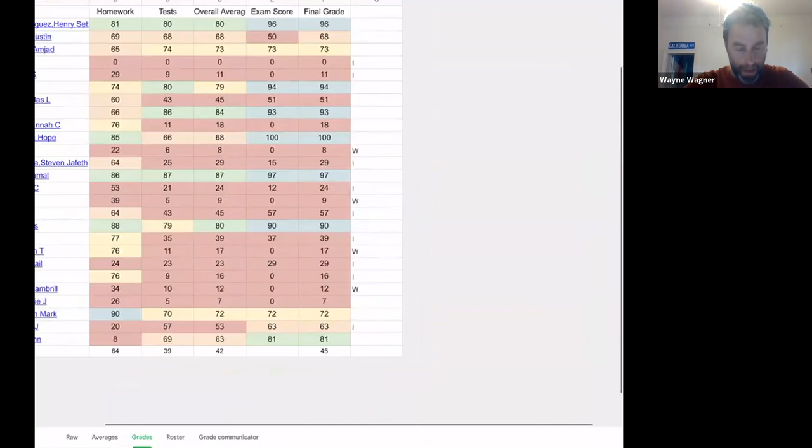Okay, so let me give you an example here. Where did it go? Oh, here we go. All right, this is from a random semester. This semester is actually fairly recent, but I won't tell you what class it is, whether it's statics or fluid mechanics. In fact, I don't even know because I've forgotten. This is how I calculate your final grade. You see there's a homework column. I'm scrolling over so that you can't see the names. But you see there's a homework column, there's a test column, and then there's an overall average.

Okay, look at the overall average and compare it to the test average. Now you'll notice this semester about half or 2/3 of the class disappeared. So that's why everything is highlighted in red. So that's how I determine your grade, is by what color the computer highlights you. So like that person at the top, their overall average was an 80. So they're highlighted in green. I didn't make any decisions. I just enter the grades in the computer, and then it will highlight you based on what your grade is.

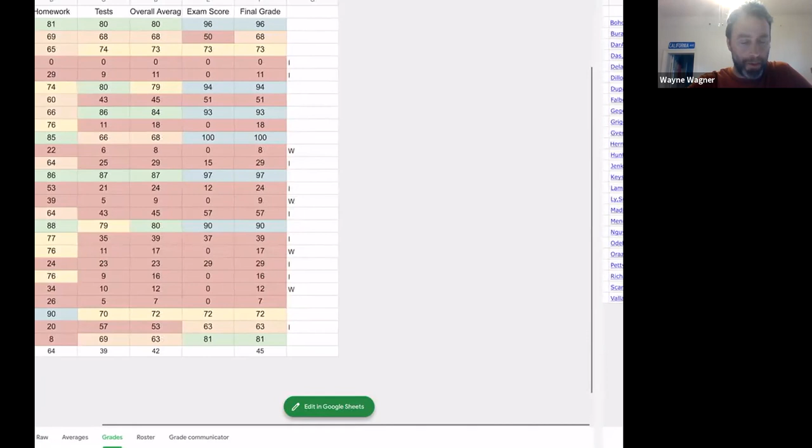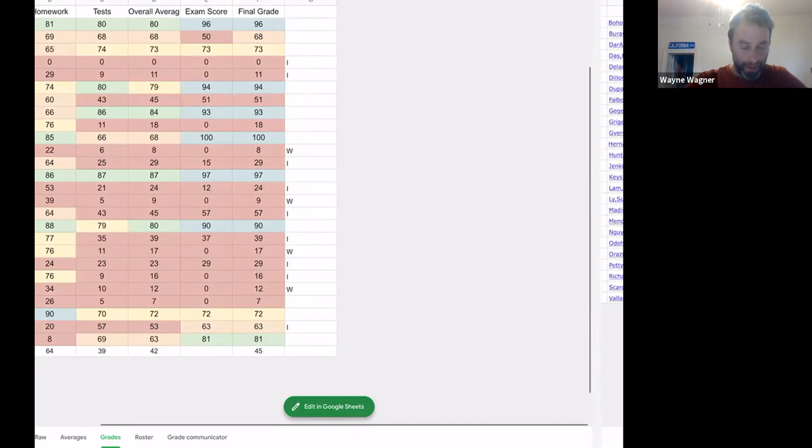So the middle column is the overall average, the left column is homework, and the next column is tests. And if you look down that, look at how the test grade and the overall average are basically the same. And look for people whose homework average actually bumped them up or down a grade. Extremely rare. It's extremely rare for your homework grade to really matter. All the way down at the bottom, there was somebody who had a 90 homework average, had a 70 test average, and they got a C. And that bumped them up 2 points. It's not important really. And I'm not saying homework is not important, but your homework grade is not important. Okay.

Now, since we're here and we're staring at this, you'll notice the exam score goes into that test average, but also if your exam score is higher than your overall average, your exam score counts for your final grade. So you'll notice that first person at the top of this particular class who had a B average all semester, they got a 96 on the final. And so they got a 96 in the class, even though their overall average was an 80. Okay, and so that's on offer to you guys too. I do that in all of my classes.

That's just something that, or like, about halfway down, there was somebody who had an 87 overall average. They got a 97 on the exam, and so got a 97 in the class. And the other thing you'll notice is that the people who get those really high grades, most of them have really high homework averages.

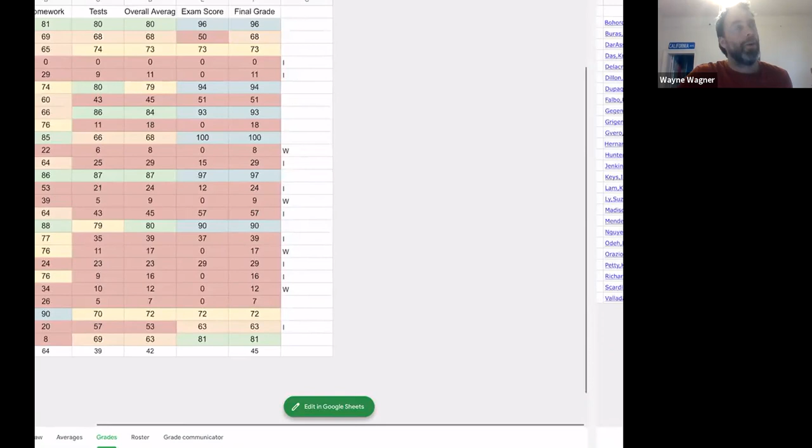And it's not because they begged me for points that they were able to get those really high scores. It was because they worked really hard at the homework. It's about the work that you put in on the homework. It's not about the grade. Okay. And I need that to be clear. I want you all to not stress so much if possible.

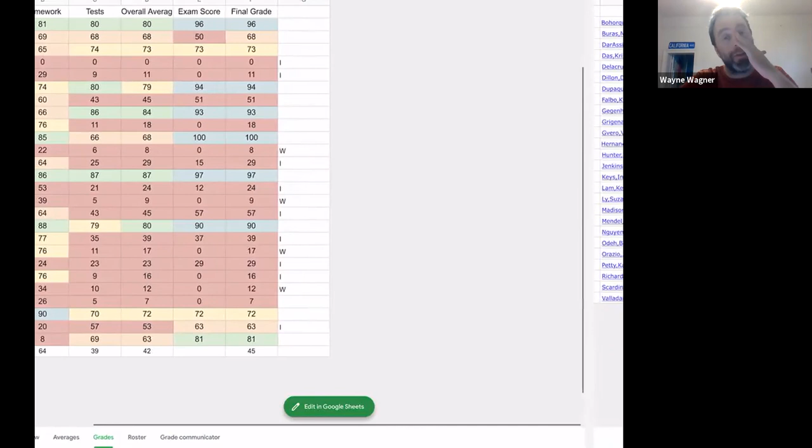Now, obviously, by all means, keep asking me if you think you've been wronged. By all means, let's get it righted. I'm always willing to right the wrongs. But when you forget a homework date or something, don't stress out about it. I still highly recommend you do the homework. And I've structured the late penalties on Connect to be like, hey, look, you're within 10 days. There's still a value to it, point wise. But really, you should do it so that you learn the material.

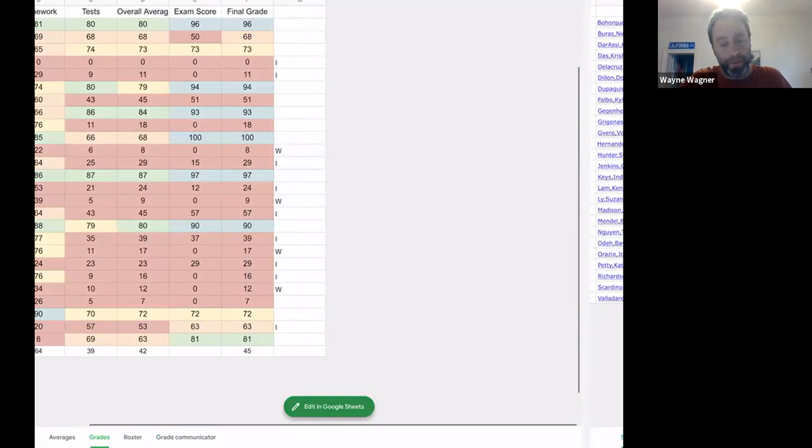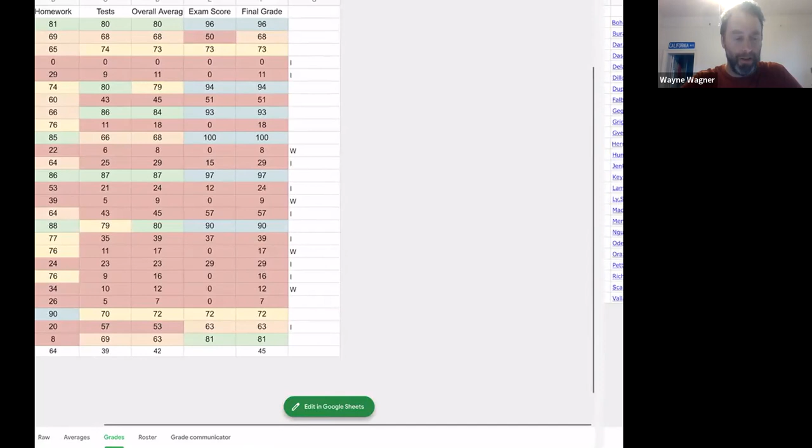Because ideally, you can be one of these people whose exam score is an A, and you get an A in the class, even though maybe your homework average for the semester was in the 60s or the 70s. Totally fine. That's very typical. That's my expectation for most of you, is to have a homework average in the 60s, 70s, maybe at best in the 80s. It's very rare for me to have somebody have a homework average in the 90s. And it looks like somebody in this class down there at the bottom had a homework average in the 90s.

So what I'm saying is, let's take care of business, but in the sense of, let's learn what you need to learn from each assignment, right? I'm picking problems that I think will teach you something. I'm not just giving you busy work so that you can get some points. I've considered just making homework worth nothing, essentially just giving you all the points, but then no one would do the homework, right? So it's impossible for me to figure out how to do this correctly.

But I think we're losing focus on what the point of the homework is. So again, if I've somehow messed up and I owe you points, by all means, let me know. But please don't stress out about it. It's not worth that much. So even if you were to look at these, about 2/3 of the way down, there's someone who had an 88 homework average and a 79 test average. And that 88 pulled them up to an 80, and they should have had a B

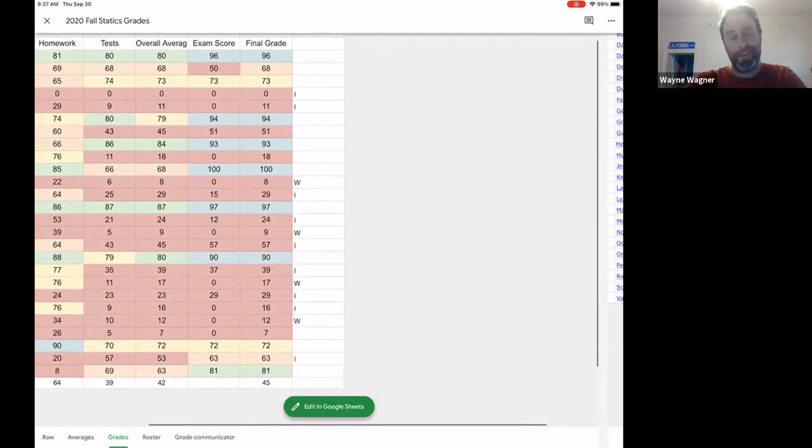for the class, except they aced the final. So if you see that column, it's 88, 79, 80, 90, 90. Well, they aced the final because with that 88 homework average, they were clearly working really hard on the material. But let's suppose they didn't do all that well in the final. And you're like, well, look, it bumped them. Yes, it did. But a couple of homework points here or there wouldn't have made the difference. It was really that they were on the bubble, and that 88 was high enough relative to that 79 to bump them.

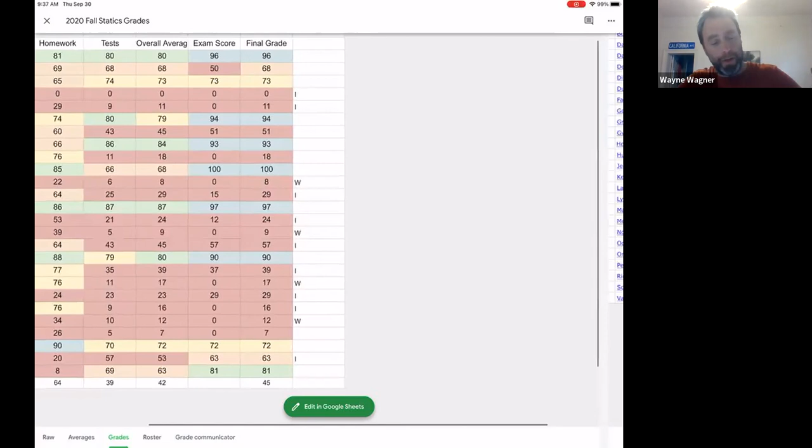So anyway, play with the numbers if you want, your own numbers. Obviously you can't play with mine. So anyway, just something that is kind of affecting my... where are we? Where's my Zoom? Here we go. Okay, so I'm going to stop share and I'm going to actually teach and not talk about that anymore. Any questions about that?

Okay, I mean, I know that I'm probably not going to convince some of you. It's been so hardwired into us that people always say, well, homework is the most important thing. And really what they should say is it's what you learn from homework that's the most important thing. And of course in high school, and I won't say that there aren't college professors this way, there are college professors this way who basically say, look, if somebody does the homework, I'll bump them.

I'm not going to bump you because you did the homework. I want you to learn the material. I only care about the material.

Okay. All right, reactions. All right, so what we're going to do here, hold on, I want to be able to see you guys if I can.

Okay. So what we're going to do here is we're talking about reactions. So basically, what a reaction is, it's like how does something, usually just a frame of some sort. It could be a truss, it could be just a frame, it could be anything. And so the reaction is basically, what does the rest of the world have to do to support our frame? Okay, so what kind of moments, what kind of forces does it need to keep something going?

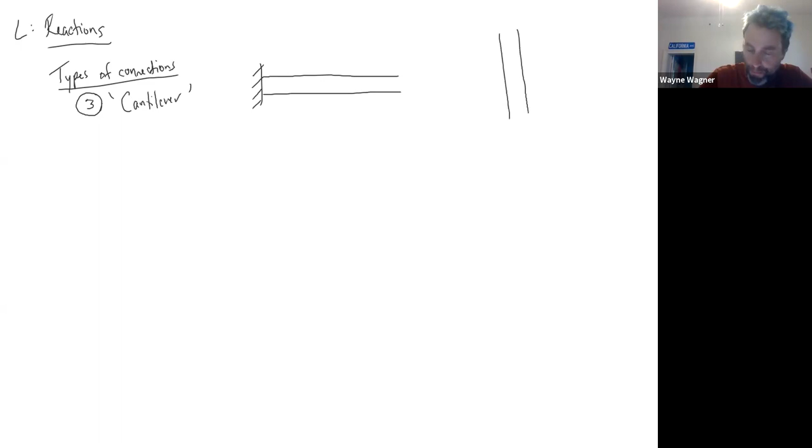And so what it boils down to is, it's usually horizontal or vertical. It doesn't have to be. But what it looks like is this. This is how it's always drawn. The right-hand side goes off and does whatever it does, but I'm concerned with this left-hand side. And it's drawn like that, or it's drawn like this. Again, there could be stuff up there on the top. I'm not really worried about the top in this case. I'm worried about the bottom.

And so when you draw a free body diagram of that thing, what you have to think about, and this is really the easiest way to think about it, is you say to yourself, okay, what kind of forces can the environment put on that cantilever? So if I were to draw the free body diagram of this thing, I'm going to cut off the world, and I want to think about what forces. Let's say this is point H, we'll just give it a letter. We'll call this point I.

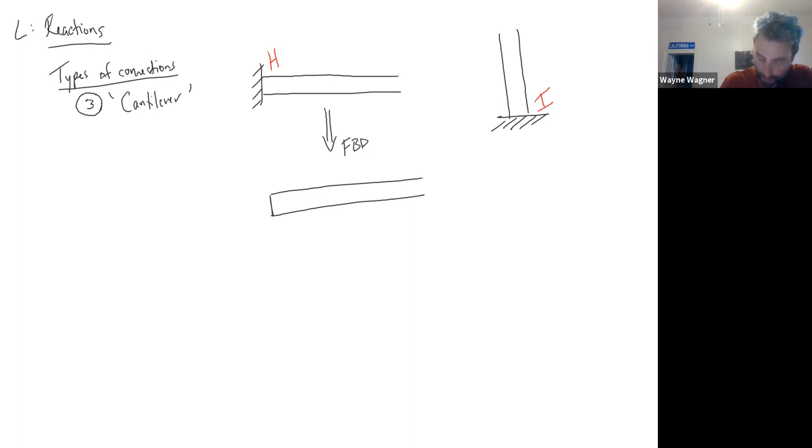Anyway, it doesn't matter. So when I've got this point H, I want to think about, well, what happens if I were to try to move this particular beam up or down, could this environment push back? And the answer in this case is yes. Let's think about the one on the right first, actually. I'm going to cut away the rest of the world. I'm going to do my free body diagram.

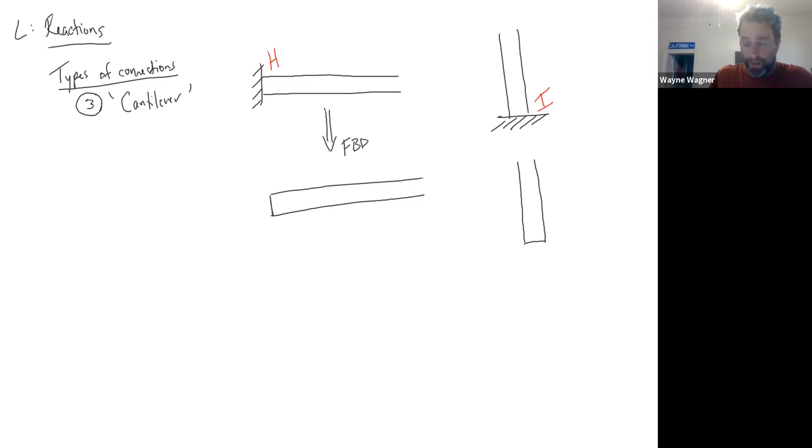So let's suppose you're walking down the street, you see this pole sticking out of the ground, and it's buried in there or whatever. And so it's kind of cantilevered like this. And so you say, well, okay, if I push against the bottom of that pole, will it push back? And the answer is yes. So I know that there potentially is a force right here. And we'll call that force I in the X direction.

Okay, and then I'll ask a second question. What if I walked up to that thing and I tried to pull it up, like I tried to pull it out of the ground? Will it resist that? Or tried to push it down into the ground? Will it resist that? And the answer is yes, it can have a force in that direction.

Oh, I should note that these are all 2D. Okay, we'll talk about 3D drawings of these in a bit. Okay, so then the last question I want to know is, will this thing resist a moment? So what happens if I twist it?

So if I went down to point I and I put a screwdriver in at point I, in the Z direction, so in or out of the board, and I tried to twist it somehow, would it resist that? And the answer is yes, it would. Okay, so that means we've got a moment. So I'll call that moment at I, a moment at I.

Now, what I'm going to recommend in general in a problem is, if you don't know the directions of the forces that you're assuming, you just assume them to be positive. That's generally a preferred way to do it. I'm going to recommend you do that again and again and again. Okay. So that would be the cantilever on the right.

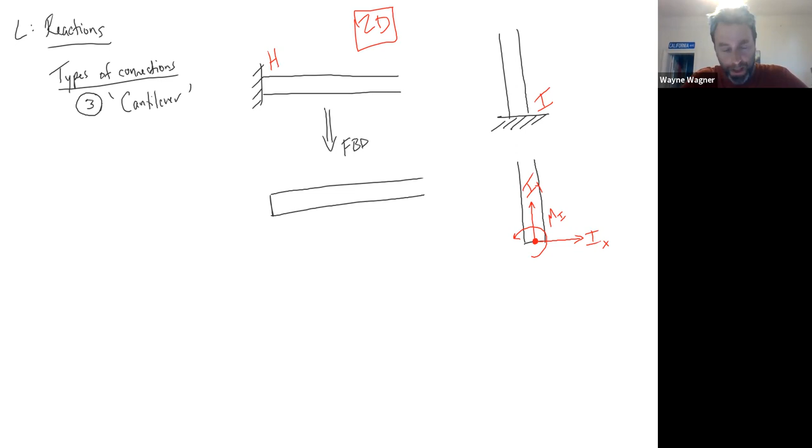The one on the left, it's the same sort of thing. So if you imagine I went up to point H and I just started pushing at the bottom of that thing and I started pushing up, or I'm pushing down, whatever. Could it resist? And the answer is yes. It's not going to easily move from that position. I'm trying to think of a case where you've got like a,

something that looks like this, a cantilever like this. And so what you can do here is once you notice you've got a cantilever, you know that this thing is solidly in that wall, right? So you can go, oh, okay, well, it's gonna look like this. If I push on this particular thing and I push this way, or if I push this way, that wall can push back. Okay, so that's gonna be HX.

And again, if I walk up to that thing and I just start twisting it either this way or this way, it can resist. It's not just going to start twisting freely. So what I'm going to do is I'm going to create a moment in H. And that moment is being caused by the wall. Right, the wall is resisting my motion.

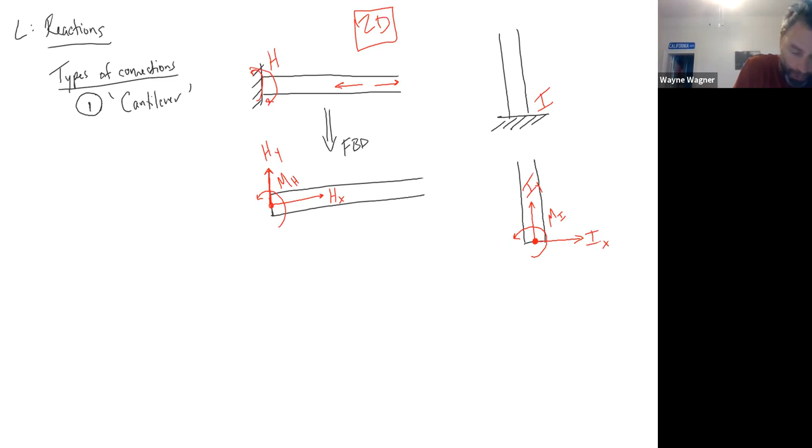Okay, and now I'm seeing why I should have done this in the opposite order. I should have gone from least restrictive to most. Okay, so that's the cantilever. Any questions on that?

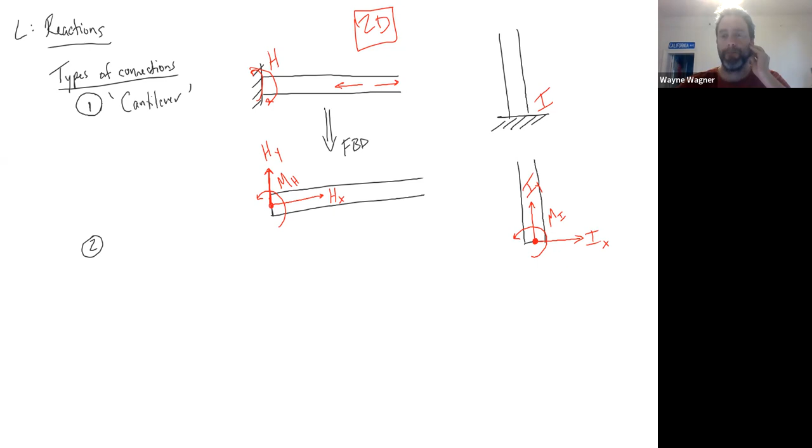Okay, so you're saying like, can you hear me? Yep. Okay, so the moments, is that like twisting it? That's not like rotating it around the axis, it's actually trying to twist the pole. So the moment, the MH or the MI, is actually the ground preventing it from twisting. So if you twisted the one on the right to the right, it would look like the one on the left. No, these are unrelated.

Oh, okay, so if I were to go up to this thing and I were to twist it this way, right? I were to apply a moment to try, oh, sorry. Come on, you can erase, you can do it. Why won't, okay, there you go.

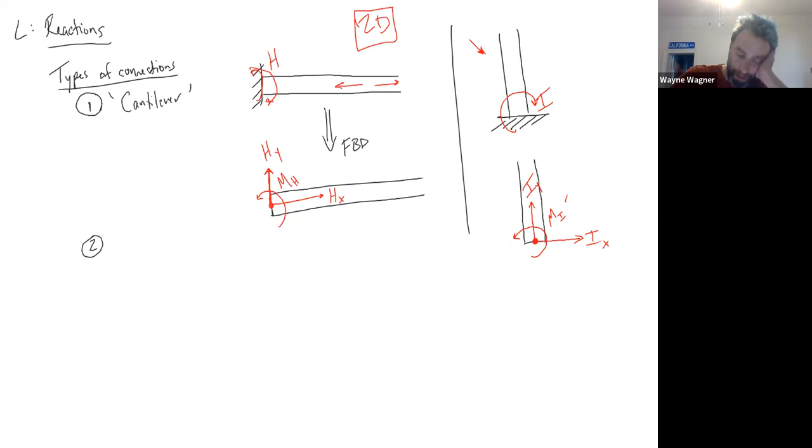So if I went up to the one on the right and I said, okay, I'm gonna start twisting on it like this, the ground essentially is gonna resist that by doing an equal and opposite moment. If it can't resist it, then the pole is just going to twist over. We'll have a failure. So maybe it's raining or something, and it just can't support that kind of moment. I see what's going on. Okay. So any other questions?

Okay. The next one is usually called a pin connection, and a pin looks like this. Let's see. There's a few different ways that you can draw it. The most common looks something like this. Well, let me draw one relative to the environment and not an interior one. Usually you draw it like this.

And then you've got a frame piece going this way. Again, I'm not worried about the rest of the frame. I'm just worried about this. And what you do is you draw the pin like this.

Okay, now again, this could be horizontal, vertical, whatever. It could be over here, with the frame going this way, whatever the case may be. What we're showing here is that that particular member of the frame is connected through this pin. So you just kind of nail something through the middle. And again, what we want to think about is, let's do the free body diagram.

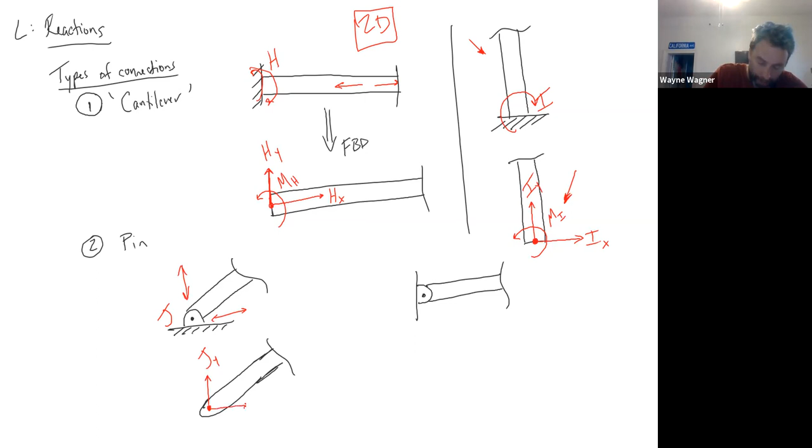We'll call this point J. So I've got a JY. If I decided to go over there and push it left or right, will that pin resist that? Will it try to keep it in the same X position? The answer is yes, so this is going to be JX. Now, if you can't figure out the sign, I always just assume positive.

And the last thing you'll want to do is say, well, what happens if I go up here and start twisting it? Will that pin resist that? The answer is no, it will not. Obviously, we're assuming a frictionless pin. If the pin is frictionless, it will not resist that. So the pin itself does not apply a moment to that frame, no matter what. And that's the same thing over here.

So every time you see a pin connection, the free body diagram looks like this. Right off the bat you can say, well, this will be KY and KX. So KY and KX. And in no way, shape, or form will you ever find a case where this thing can suddenly...

Hey, Wayne, for purposes of this example, do we worry about the bracket attached to the wall, like forces being transferred through the bolt or pin to the wall? Or are you just focusing on the hinge? We're just focusing on how the hinge is supporting the rest of the frame. If you were asking about the bracket, then the wall can support a moment on the bracket, but that moment cannot be transferred to the frame because it's going through a pin. Makes sense.

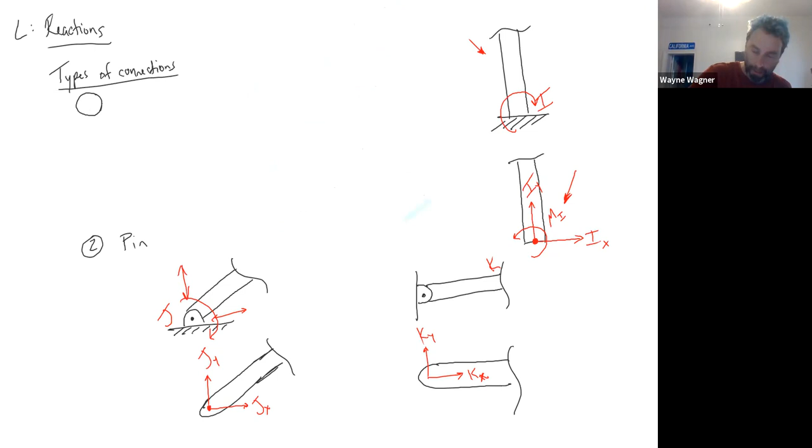So this is pretty straightforward. The pins are pretty straightforward. It's the last one that we're going to do that can be kind of strange, and the last one is the roller. Rollers can be written a lot of different ways, and hopefully I can remember them all. Let's see if we can do the roller. It looks like a wheel. Usually you'll write it like this; this is the most common.

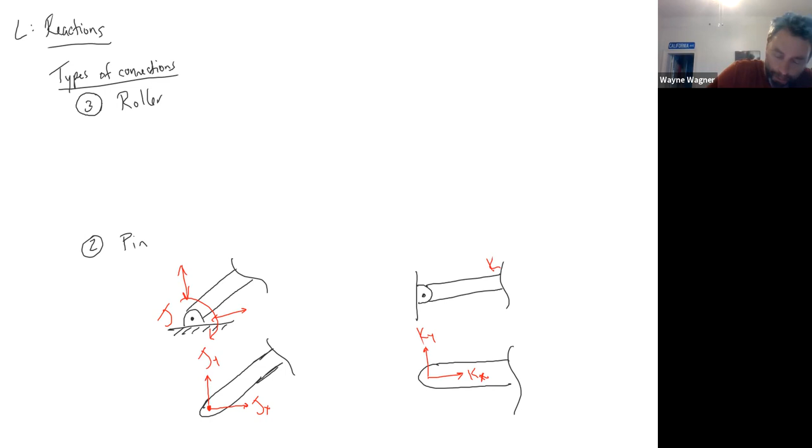This is a very common way. You've got some sort of frame, and it looks like it's sitting on a wheel. You will also see it drawn like this. I'm going to draw a few of these. Sometimes you'll see it like this. Sometimes it'll look like a little rocker. I really hate when they do the rocker. It doesn't really matter. The key is that when you see it, you go, oh, I see what's going on here.

And usually, the bottom is almost always drawn with these diagonal lines to let you know that that's what's going on. Okay. And again, in this case, what you have to think about is, okay, if I walk up to that thing and I want to draw a free body diagram, then what I'm going to do... I mean, all of these are the same drawing. They're different looks of the same drawing. So here's my free body diagram.

Okay, and I want to look at it, and hopefully you're already understanding what I'm saying here, that if you push on this thing up or down, well, it's going to resist. Okay, now rollers as drawn really only push up. But a lot of times there are problems where they'll say something like, this roller is on a track and the track is keeping it from moving.

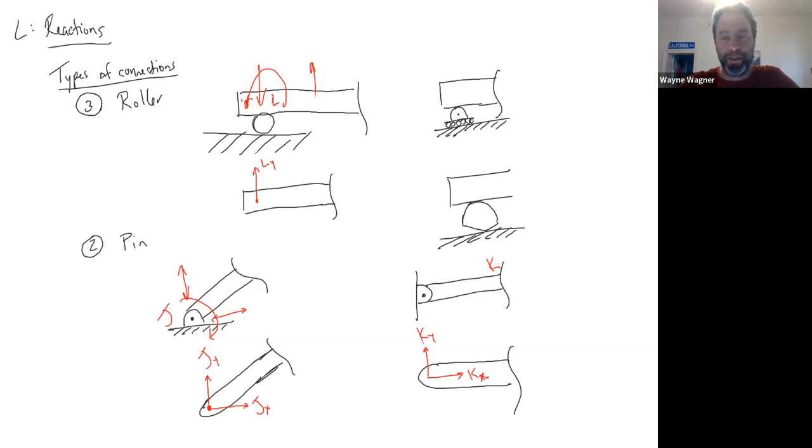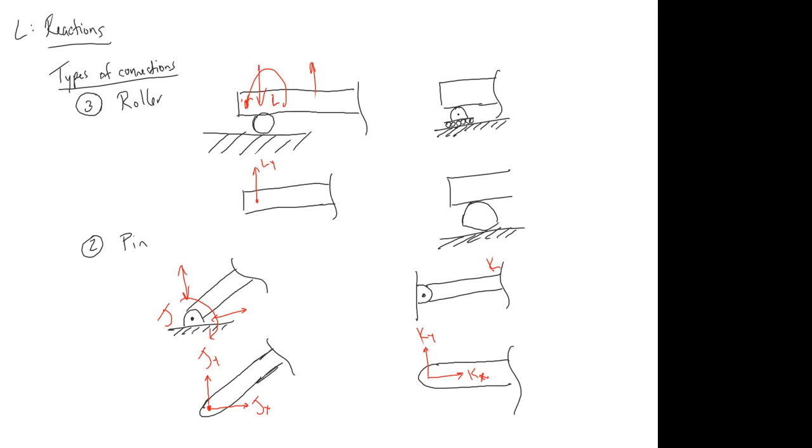Okay, yeah, go ahead. So the roller, no force in the X direction? No force in the X direction, unless the roller is oriented vertically. And then the pin also has no moment because it's freely swinging about that pin? Yeah, that's actually the correct term for it, freely. I don't know about freely swinging, but freely moving or freely rotating would probably be the best term for it. Okay, cool.

Okay, yeah. And that's really what you always want to think about. Obviously, in the real world, there's friction and things like that, so there's nothing perfect like this. I don't know how often we design static things with rollers. I think a lot of times we use rollers in statics class because we haven't learned more structural analysis, and if we don't use a roller, then we can't solve. I'll make that clear as we go.

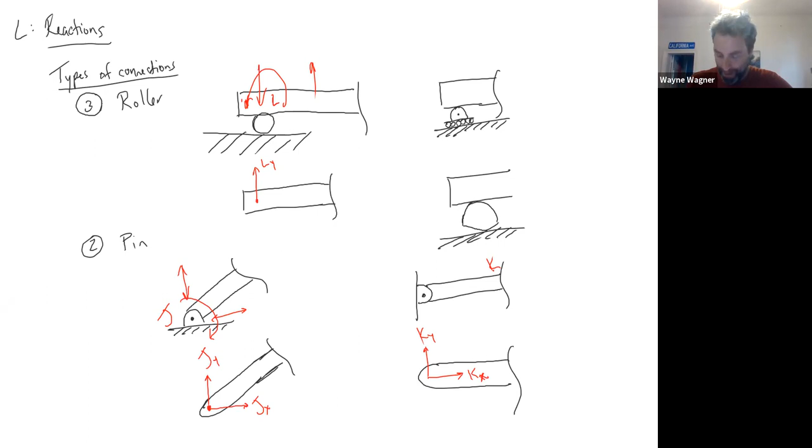So here, I'm going to clear all my drawings, and then I'm going to do an example problem. I did this one on an exam last year. And actually, this one's definitely out of your textbook. I had it open to it. Oh yeah, there it is. Okay, so it's a bit of an annoying problem because it's just got a lot of forces, and it probably wasn't a good one for an exam because it took too long. So there's a frame element here. If you want to look for it in your textbook, it's 4.4.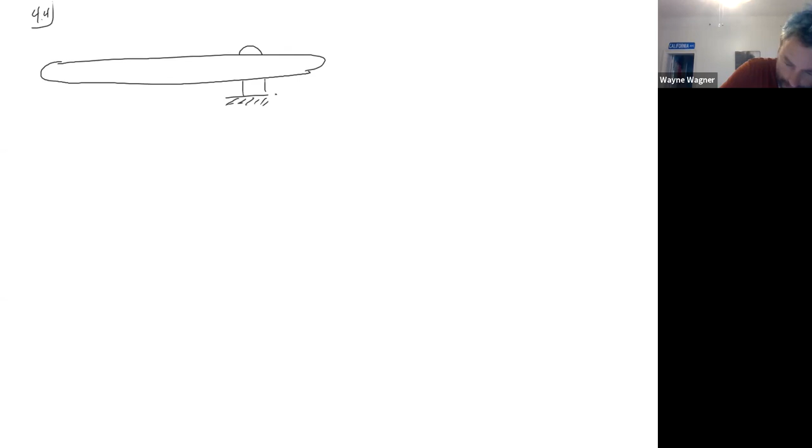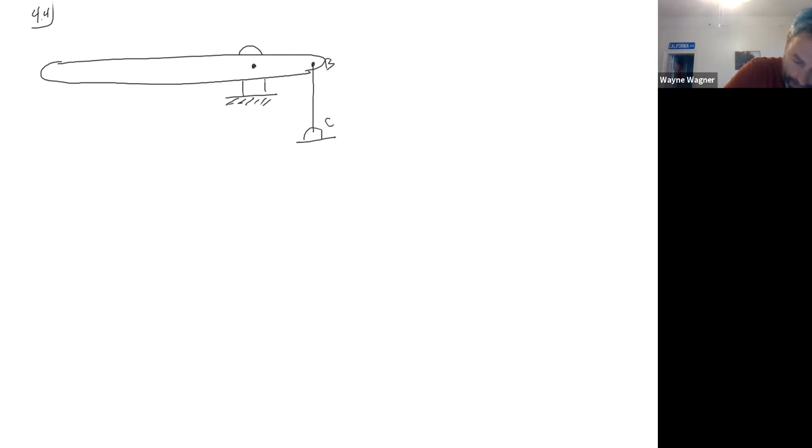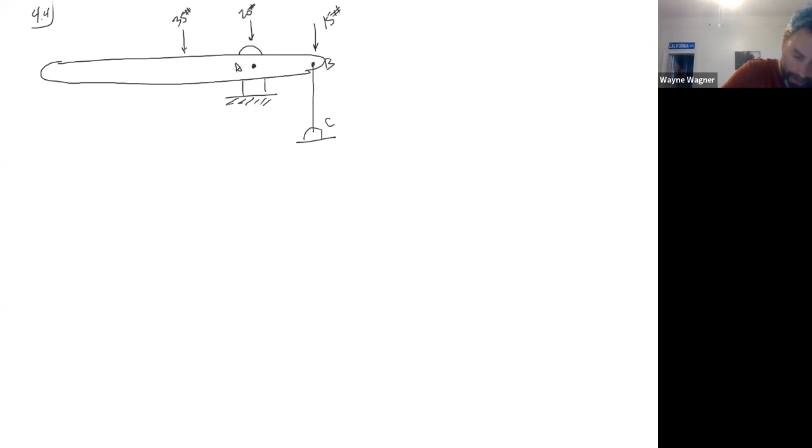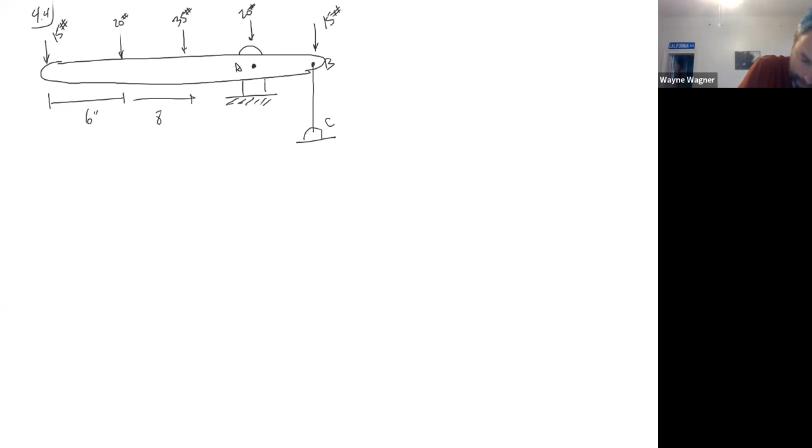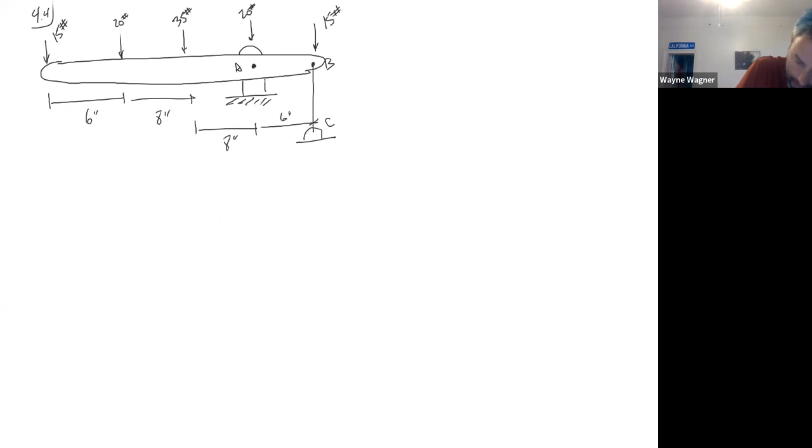Okay, and what is it that we're looking for? Oh, it says solve for the reactions. Okay, determine, so that's given. And the required is we want reaction at A. So I want AX equals what? AY equals what? When they ask for the reactions, usually we say AX, AY. Because this is a pin, I'm not going to solve for the moment at A, we're not worried about that. And then it wants the tension in BC.

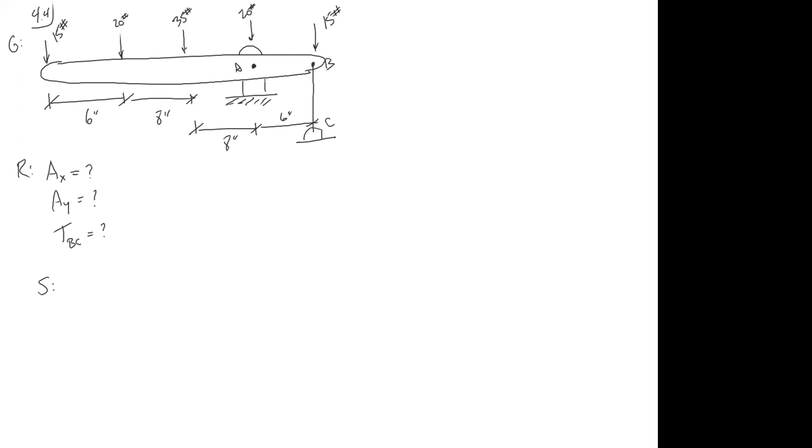Anybody want to tell me how to solve this? What the first step is? Sum of forces. There's something we always do before sum of forces. But that is the correct answer. Okay, so anytime you sum forces in my classes, you have to draw a free body diagram of the thing you're summing forces on. Otherwise, I'm not even 100% sure what that means.

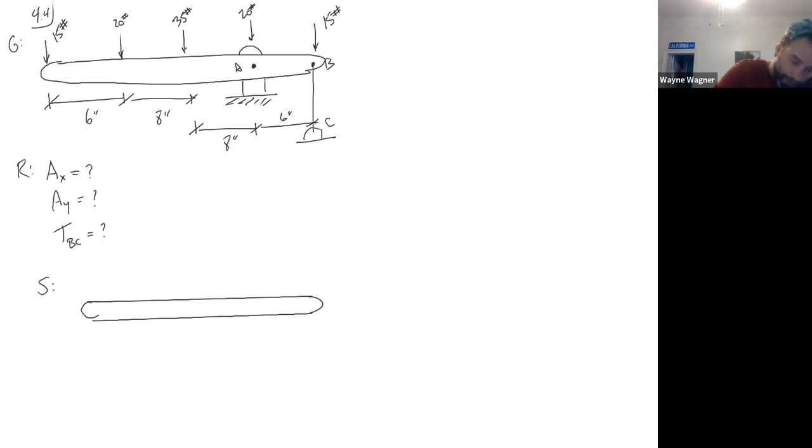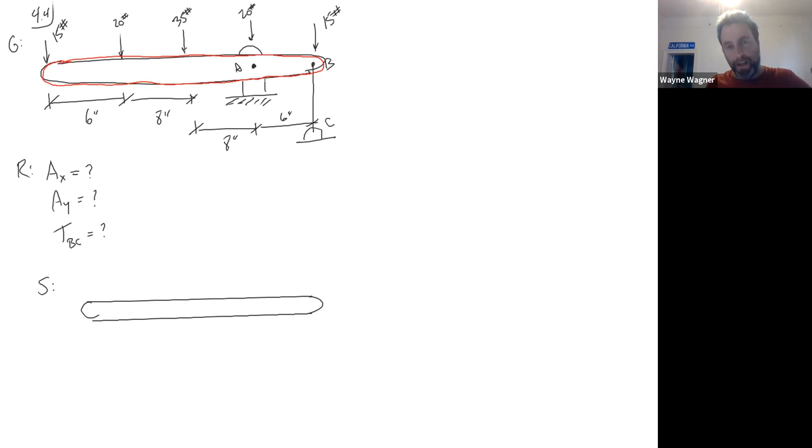So I'm going to go up to this thing and say, okay, this is what I'm drawing the free body diagram of. So I've got this red line. Now I need to think about all the forces. They didn't tell us anything about weight. The only force that doesn't cross that line would be a weight, that's a body force. All the other forces are surface forces, things that I've cut away by deciding that this is my free body diagram.

So I've got 15 pounds here, 20 pounds here, 35 pounds here, 20 pounds here, and 15 pounds here. I also cut away the world at A. So I've got two forces at A because it's a pin connection: AY and AX. And I also cut the rope from B to C, and the nice thing about that is I know that it's going downwards. So TBC.

Note, I don't know which way AX and AY are going. It seems likely that AY is going to be up because we have so many downward forces. In fact, it's really hard to imagine anything else happening. But AX, I don't know. I didn't even think about it, I just automatically make them positive. You will find other people do it differently. But when you solve these, if you get a negative number, that means you drew the arrow in the wrong direction. So you're right, we're going to sum forces.

Basically, this is a two-dimensional statics problem. We know that this thing is not moving, so the sum of the forces in X equals 0, the sum of forces in Y equals 0, and the sum of the moments in the Z direction around a certain point are 0, or really around any point. In the X direction, this is really nice. I'm going to expand this term. I only have one force in the X direction, that's AX. I'll leave the right-hand side alone. So there you go, I've already solved for one answer: AX equals 0.

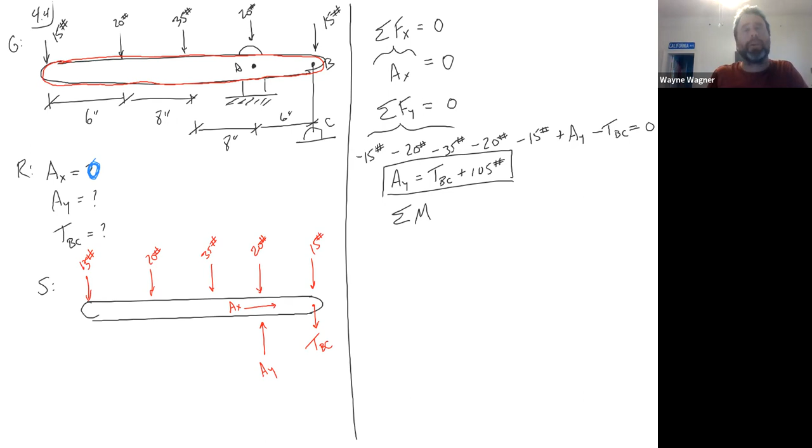Okay. So this is where we're going to start thinking about moments. And there is some magic, maybe not magic, magic is the wrong word, but there is some intelligence that comes with where you pick your moment to be. So we can pick a moment anywhere on this thing. We can even pick it off of this thing if we wanted to. Like I could take a moment around a random point up here if I wanted to.

And what's going to happen is the sum of the moments is still going to be 0. The sum of the moments has to be 0 everywhere on this frame. Obviously doing it up here seems a little bit difficult, a little bit annoying, and not really the way that we want to go. Anybody have an idea what the best point for doing a moment on this problem might be? My first thought is the pin or the rope connection. Okay, so either here at A, where it wants to pivot naturally.

Yes. A lot of times where it pivots naturally is a very good way to do it. I like that location, at A in this case, because it's logical to me. But really A or B is your best choice. And it's all about math, really, and about how many forces we've got. Well, we've got 1, 2, 3, 4, 5, 6, 7, 8 forces, right? So this is an annoying problem. There's a lot of different forces.

So I want to pick a point that the line of action of as many forces as possible goes through. So if you'll notice, if I pick A, for example, AX goes right through the middle of that. This 20 pound goes right through the middle of that. And this AY goes right through the middle of that. So all of those have no moment arm at A.

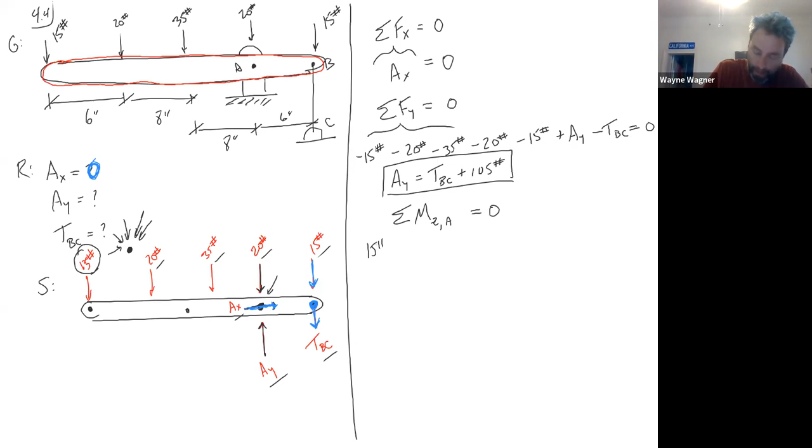We'll start with the 15 pounds. Its distance away is 8 inches, 8 inches, 6 inches, so that's 16, 22 inches. That is causing things to spin around A counterclockwise, so a positive sign. Notice I'm keeping this in inches because I don't feel like converting. This basically means all of our moments are going to be calculated in inch pounds instead of foot pounds, which is a little bit annoying, but we can convert it later. You just have to be careful if you decide to do that.

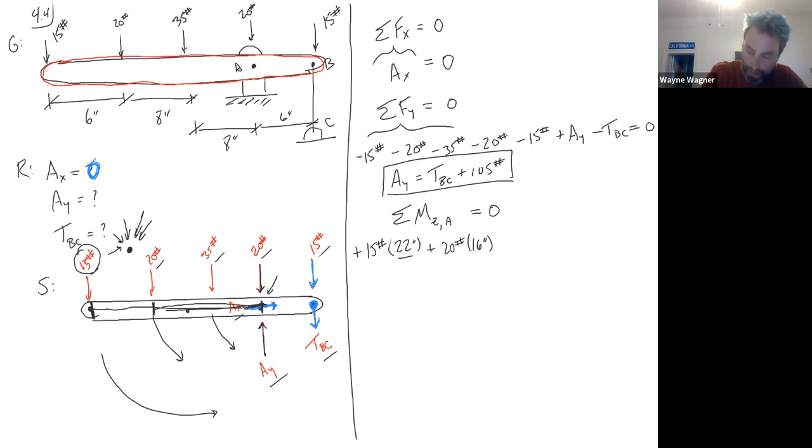So this 20 is going to be the same direction, and this 35 is going to be the same direction. So plus 20 pounds times its perpendicular distance. Remember, we're talking about perpendicular distances. So this 22 inches is perpendicular to that force. This 20 pounds is up-down, so we need a left-right distance of 16 inches. This 35 pound, perpendicular distance. Wait, why is it only 16 inches? Because we're going from A to this point right here for that 20 pound force. So it's 8 inches to here and then another 8 inches to here.

Okay, thank you. Okay. All right.

So then when we get to this 20 pounder, it's got a moment arm of 0 because it's going right through our point. AY has a moment arm of 0 because it's going right through our point. AX has a moment arm of 0 because it's going right through our point. So we like all of that. That makes us happy.

And then we've got to get this 15 pounder here. And relative to our point, it's causing things to spin this way, so that's going to be a minus. I could make this 15 pounds plus TBC because they both have the same moment arm, but I'm just going to keep them separate for now. That's 6 inches. And then we're going to do the minus TBC, also times 6 inches, equals 0.

So at this point, you should see that this is just a math problem, right? We're going to solve for TBC here, and once we have that, we will plug it in right here. I'll solve for TBC relatively quickly. Notice because it's all in inches, the inches cancel out when I do the division. So 15 times 22 plus 20 times 16 plus 35 times 8 minus 15 times 6, and we'll divide that by 6. If this were on a test, I would recommend you plug that into your calculator twice, just because there's points involved. Okay.

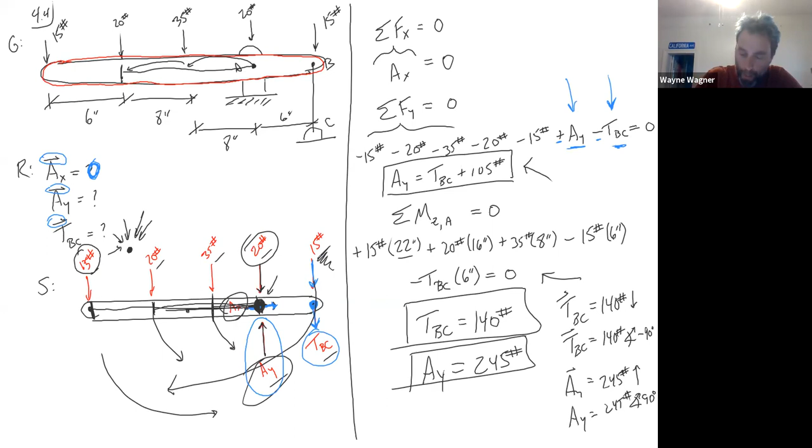Yeah, so I got kind of lost on the TBC and the AY with your directions. How do you determine that? Is it just numerically one's positive or negative? Oh, so the way I determine direction is, right at the beginning of the problem, I assumed AY was positive, and I assumed TBC was negative, or downwards. So when I plugged them into the equation over here, I assumed AY was upwards by giving it a positive sign, and TBC was downwards by giving it a negative sign. And when I did my moments, I assumed TBC was downwards, so I gave it a sign commensurate with that direction.

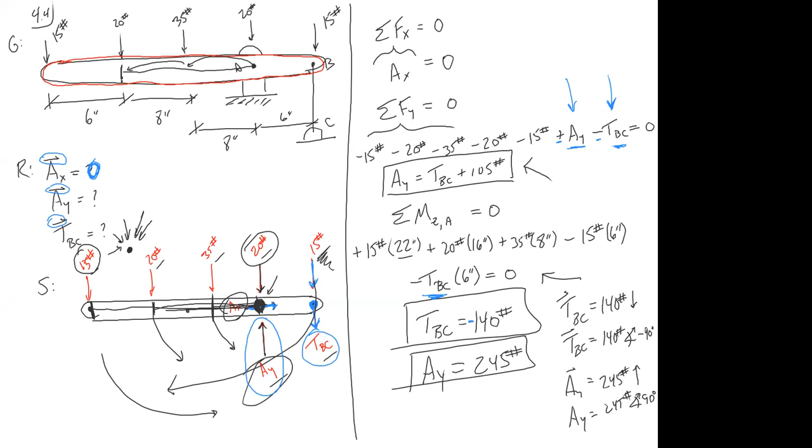If at the end I'd gotten a number and TBC had been negative, that would have meant I assumed the wrong direction for TBC. Got it. Okay. And the trick here is, some people will tell you to figure out what direction the force is going beforehand and assume that direction. That's fine, I'm okay with you doing that. But I like to always assume positive unless it's a tension. That way, when I get a negative sign, that just means it's downwards. But if you assume it's downwards and you get a negative sign, that means it's upwards. So, how confusing is that?

Not too confusing, but when you're doing 10,000 things and you've got 100,000 calculations that you're working on, whatever you can do to make things simpler is beneficial to me. So let's do another one.

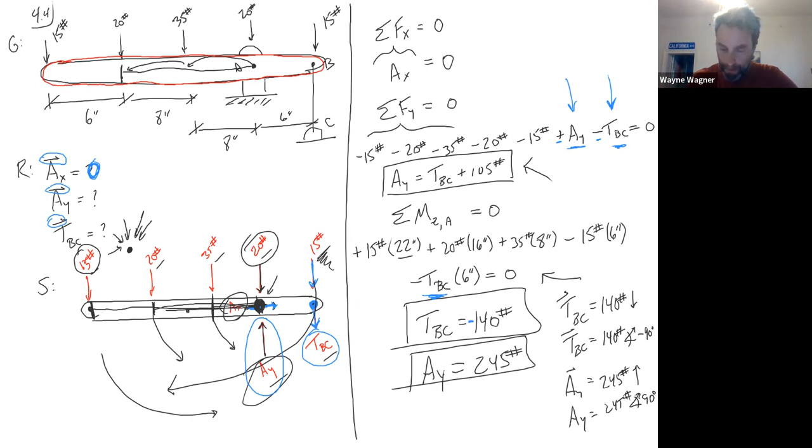Okay, so good questions, great questions, guys. Y'all are crushing it. I'm enjoying y'all. This is really quite wonderful.

All right. So this one's different because it's just got a few more things going on. By the way, we're going to do 3 examples today, and I should really give you all copies of these so you can see the many different drawings of pins, cantilevers and things like that. Okay, so here we go.

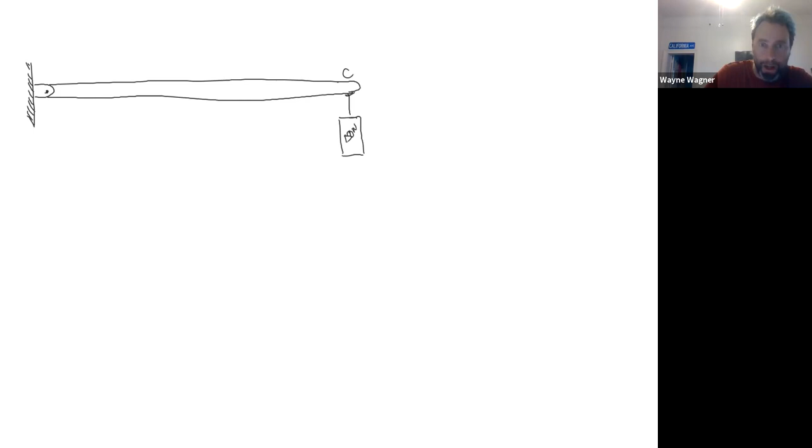We've got a weight right here. This is point C. The weight is 150 newtons. This one I really liked because I've just never seen one like this before, and I thought this was pretty cool. So this is point B, this is point C, and this thing is going up like this.

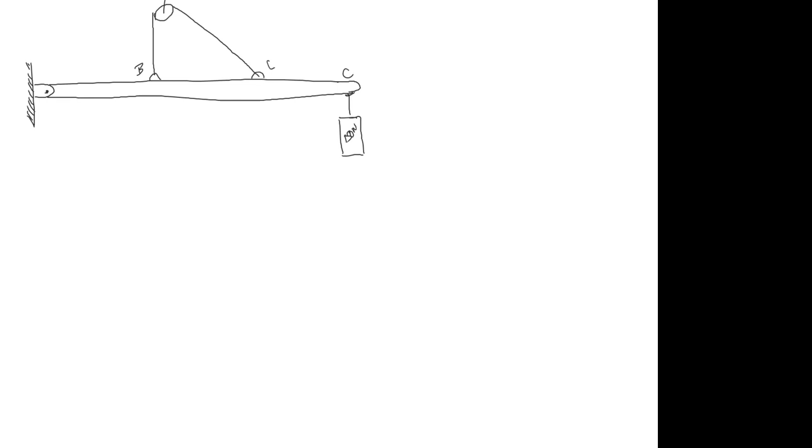Wayne. Yeah. So at point C, if you don't specify a distance to the very tip of it, we would just assume that weight is suspended from the very tip. Yeah, but you'll have a distance, unless the point of the question is to solve for the distance. You should always have distances. Like what I'm drawing right now, this is 3 meters, this is 5 meters. Well, I'm talking about to the right of that weight. Oh, like this little bit right here. Yeah, I don't want that. Okay.

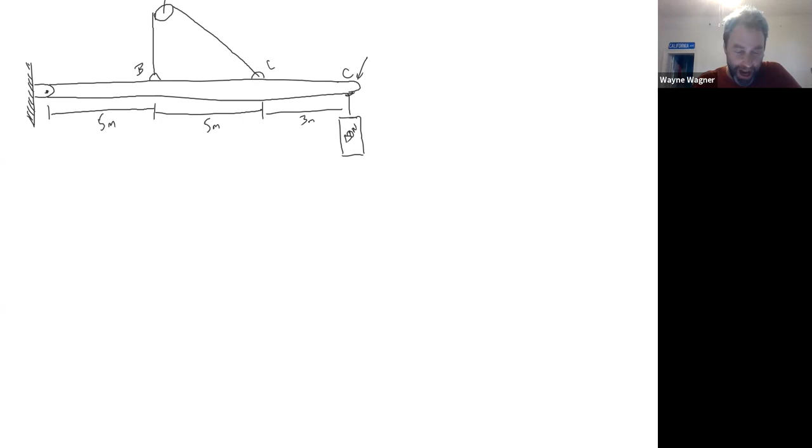I've never seen somebody try to be sneaky on that. I guess it could happen, right? I don't want to tell you what your other professors might do.

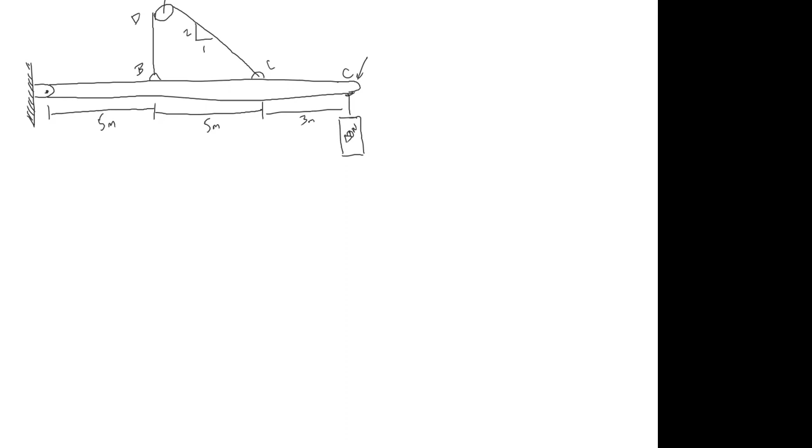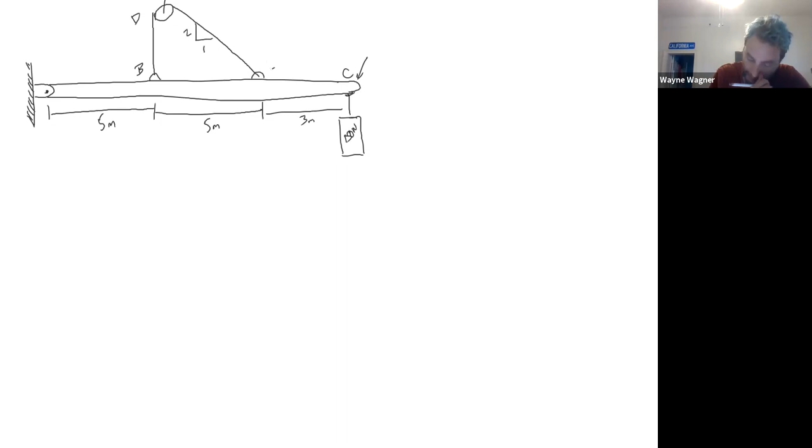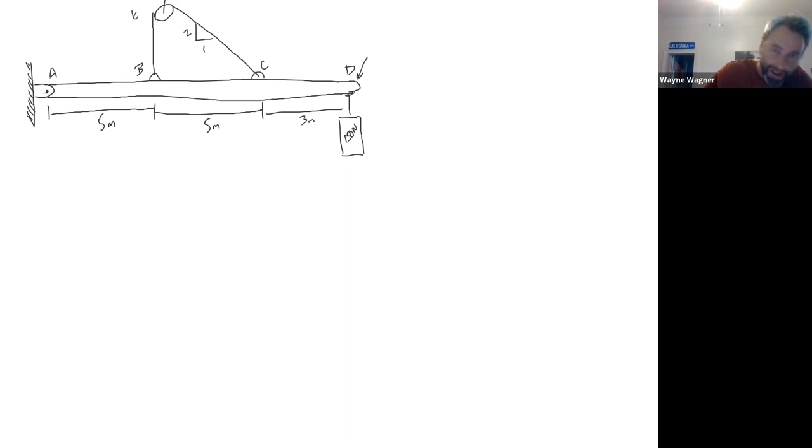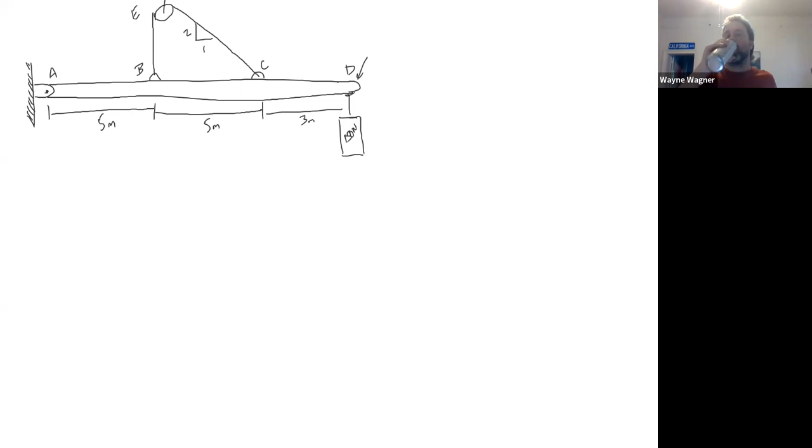Okay, so go. Do we have 2 C's on here? Oh, we do. What did I do here? Good point. You know what, I'm going to use my own letters because this is silly. This should be A, B, C. Let's make this D, and this point up here will be E. Thank you. The original drawing only marked 4 of the 5 points, and so I accidentally gave a C where there shouldn't have been one. Anyway, thank you.

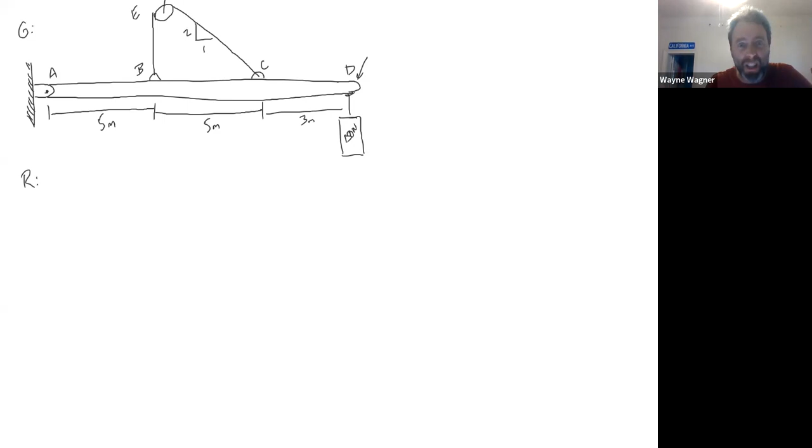So this is given. The required is to determine the tension in the cable. So tension equals what? And this is a pulley up here at the top. I can't write the word pulley because it's too close to the top, so please bear with me. PUL means pulley. So we want the tension in the rope, and then we want the reaction at A. I'll put an arrow on the top.

To some extent, you should already be able to tell which direction AY is going, and which direction AX is going. Can anybody tell me right off the bat which way these are going without doing any work at all? Does anybody have a guess? First I was going to say swing down because of the weight on the end, but will the pulley counter that with the rope? So my first guess is swing down, but it might not be that much because of the pulley and rope.

So you think AX or AY? Oh, I was looking at D, way over in D. So AY, the whole arm should go down, clockwise. Well, there can't be any clockwise because it's a pin, so it can't support a moment. So the guess is down. Okay. So AY would go up. And I'm going to draw a free body diagram because we're summing forces and moments. You always need to draw a free body diagram.

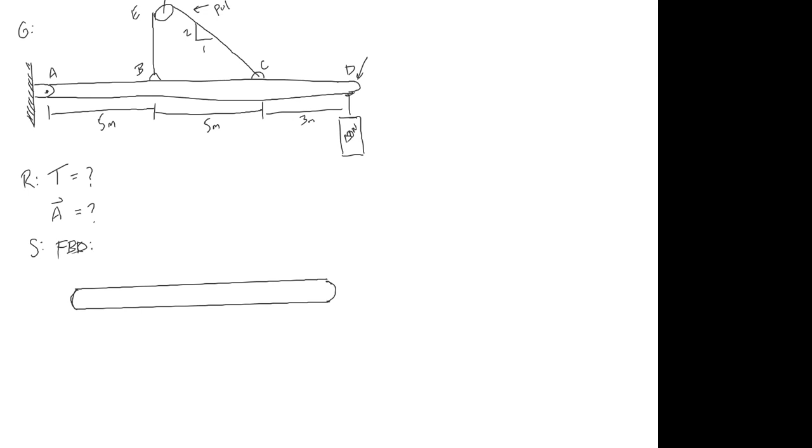A lot of times in statics class, especially for the reactions, we just do the free body diagram on the initial drawing. I don't particularly like that, not because it can't work just fine, but for beginning students a lot of stuff gets lost in the weeds. Do you want the tension in the rope on the weight or in EB and EC? Well, the rope on the weight is straightforward, it's 150 newtons. I want the tension in the cable. And EB would equal EC, correct? Yeah, EB will equal EC, and that's why I just use one letter, T.

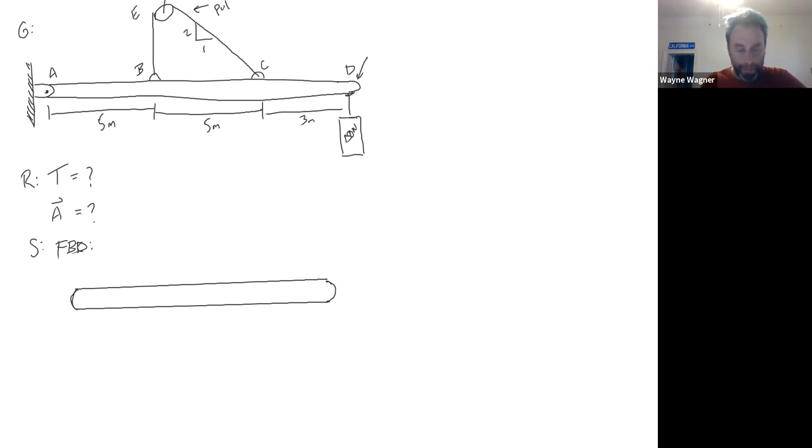And so for this one, for the tension, I don't have any markings on it, so we're just going to go for the magnitude of the tension. And then for the other one, for A, we're going to look for the vector itself. So here's my free body diagram. Again, I've cut away the rest of the world.

Okay, they didn't tell us anything about the weight of this beam. By the way, if they ask you for the weight of the beam, for now, just assume the beam has evenly distributed weight and apply the weight at the midpoint. So in this case, if this thing is 13 meters long, you would apply it 6.5 meters from A, 6.5 meters from D, and you would just put a downward force where that weight is. It's not really quite that simple, but we'll get to that, or we won't. But it'll show up in your structures classes.

Okay, so then we've got a force C, and it's going to come off like here, and that's going to be a tension. We're going to get a tension right here. And then for AX and AY, what I always tell people is assume positive. Right now already, if you're looking at that thing, you should be able to tell that AX is going to be positive, because in terms of X forces, we've only got one force in the X direction, and that's one tension pulling back towards the wall. So this thing has to push back the other way.

I'm going to go ahead and assume the wrong direction, just so that we can see how this will work out if we choose the wrong direction. And then from the moment standpoint, it doesn't matter. I'm going to assume both of these are negative. The AY is going to end up being the correct direction, but let's just go ahead and roll with it.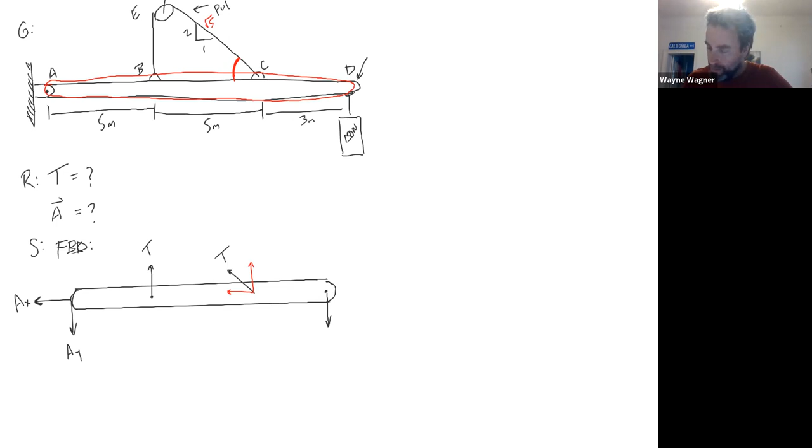Let's do it the way most of you would do it. Let's find this angle. That angle is going to be the inverse tangent of 2 over 1, inverse tangent of 2, essentially: 63.435. So that means this one right here is going to be T sine of 63.435, and this one right here will be T cosine 63.435.

I would be more inclined, if I was doing it, to say that this would be T times 1 over the square root of 5, and this would be T times 2 over the square root of 5. It's whatever you want to do. If I type in 2 divided by square root of 5, I get 0.8944. And if I do sine of 63.435, I get the exact same number. This is the unit vector, and this is just the trig function. So it's whichever way you want to do it.

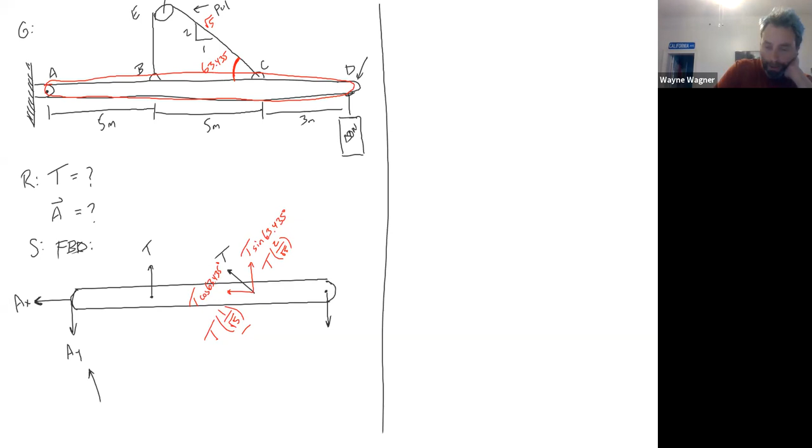Okay, so now we're ready to roll. I'm assuming negative over here. I don't recommend that, but we're just going to go ahead and do it. So sum of the forces in the X direction equals 0. We know this thing is static. Now, if I don't know what I'm doing, I would just go in order: sum of forces X equals 0, sum of forces Y equals 0, sum of the moments around some point equals 0.

What I recommend to you is, if you don't know what you're doing, just do X, Y, and then moments. If there's something specific you're looking for, it helps to think about the equations before you begin, so that you can visualize which one you're going to work with and don't have to do all this extra work. The X direction is really easy in this case. A lot of times the X direction is. Obviously, I can give you a problem where it isn't. So in this case, I've got AX, which is negative because I assumed it was negative.

Okay, and then I've got the X component of the tension in that particular rope right there. So minus T, I'll use the cosine of 63.435 degrees. Okay, equals 0. So I could have assumed AX is positive. Would that have messed up anything? No. So looking at the diagram, I can tell you AX is going to be positive.

I'm intentionally making this quote unquote error, right? So if you assume the wrong direction, what happens is what I'm going to show you. When this is over, I'll go back and I'll just change that AX as I've drawn it, and I'll change it the other way, but you'll see it won't matter. You'll still get the right answer.

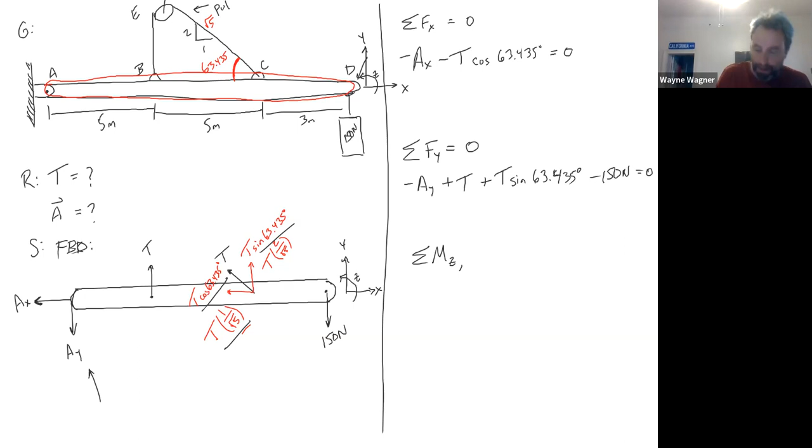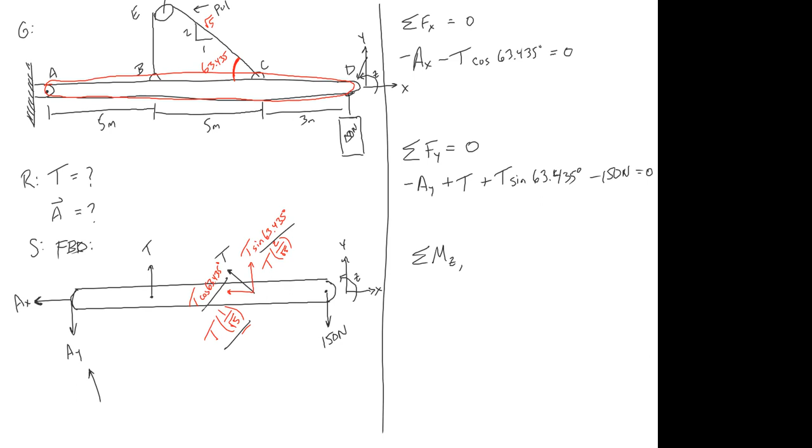Okay, and actually, usually you want to do that on your free body diagram. I always forget. And so again, where do you think I want to take my moment? A, right? Because then we don't have to worry about AY and we don't have to worry about AX because both of those go through that point, right? So if I take my moment here, I've got no perpendicular distance for AX and AY and one other kind of force. What's the other thing that I won't have to worry about? Oh, I don't know.

Okay, so the other thing that we won't have to worry about is the X component of this tension. Because you can see, if you look at the line of action, it just keeps going, and it goes right through there. So we don't have to worry about the X component of that force. So that's always nice. Okay, so this equals 0. So I'm going to expand this one. Note, by the way, I'm always expanding the left-hand side of this thing. A lot of people like to do really weird things and it creates problems. So always work downwards.

Okay, so I'm starting at this point at A, and notice AX goes right through the middle of it, AY goes right through the middle of it. So don't worry about those. And so I'm just going to go to T. So T is going up and it's causing things around A to go counterclockwise. So it's going to have a positive sign. And its moment arm is 5 meters.

Okay. Then I'm going to go to the angled force. And again, like I said, this one we don't have to worry about because it doesn't have a moment arm. It just goes right through point A. But we do have to worry about the vertical one, right? And that's causing things to go counterclockwise. So we're going to go plus T sine 63.435 degrees.

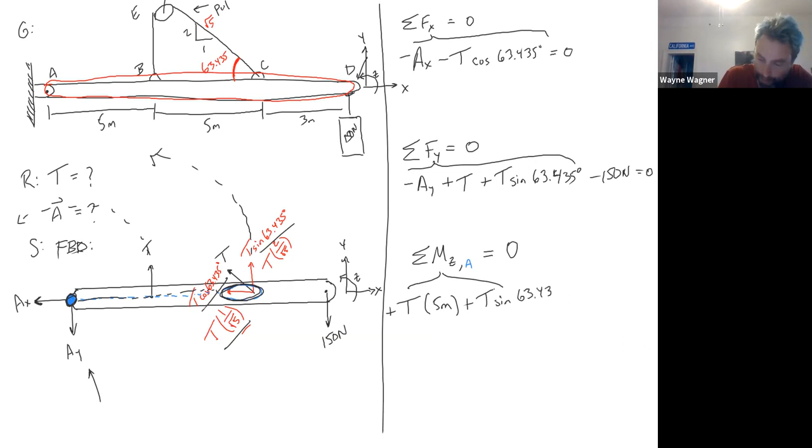Okay, times its moment arm, which is what, 10 meters. It's always good to step back at some point and go, wait, did I get the moment arms right? Did I remember them? Because it happens. And then we got this 150, which of course is causing it to spin the opposite direction around A. So I'll go minus 150 newtons times its moment arm, which is basically the full thing, 13 meters. It equals 0.

Okay, questions about how I got that equation? Because after this, it's just algebra. And when I grade your exam, most of the points are: can you get these equations? Solving the equations, if it's a 10-point problem, would be at most 4 points, but usually it's 2 points. I guess it kind of depends, but most of the points are just getting these equations.

Okay, so I'm gonna solve this as quickly and prettily as I can. So we'll say T times 5 meters plus 10 meters sine 63.435 equals, I'm bringing the 150 times 13 over to the other side. That's 1950 newtons times meters. So then I'll divide both sides by that big nasty parentheses thing, 5 plus 10 sine 63.435, equals 139.84 newtons.

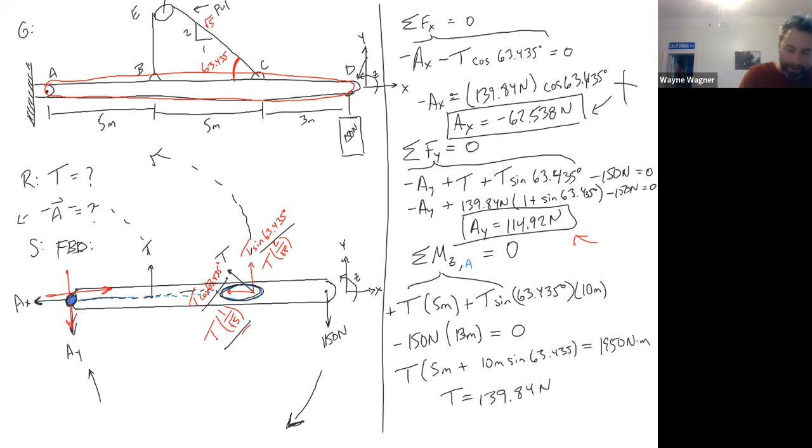Okay. So what this all means is that Ax was drawn the wrong way. So Ax should look like this. And Ay, because it ended up with a positive sign, was drawn the correct way. So it should be like this. In this case, I asked for the vector of A. So we should go ahead and get that vector, and the way we would normally do that is in polar coordinates.

I'm going to do this quickly because at this point you should know that the magnitude of A is the square root of 62.538 squared plus 114.92 squared. And the direction theta: we're talking about a triangle that's 62.538 this way and 114.92 that way. I know I'm doing this quick and sloppy. So this is going to be the inverse tangent of the opposite, 114.92, over 62.538. And so that's how we would solve this.

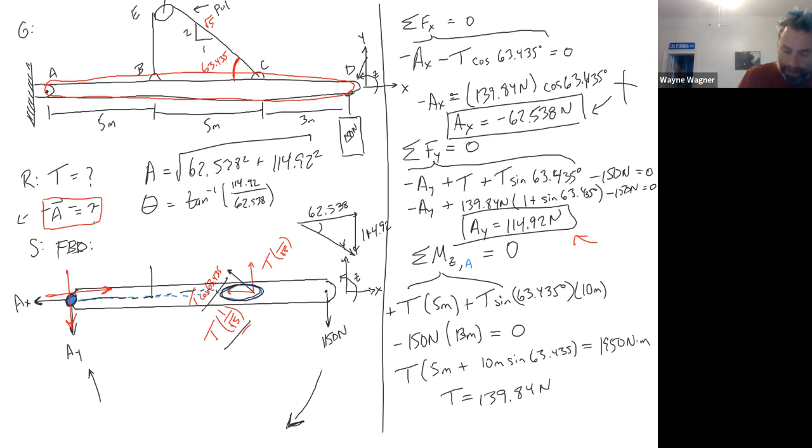And so our final answer for A would be, let's see here. I might get out of here. I really should write a little program to do this Pythagorean theorem.

I bet there's probably one built into the calculator. So A equals 130.83 newtons at an angle. In this case, it's a negative angle, like that. Inverse tan of 114.92 divided by 62.538, close parentheses, equals 61.446 degrees. And because I only want 3 sig figs, it'd be 131 newtons at an angle of 61.4 degrees.

Okay. If I just wanted AX or AY, AX would be 62.5 that way. And AY would have been 114, or 115, excuse me, 3 sig figs, down. Okay, so yeah. Any questions?

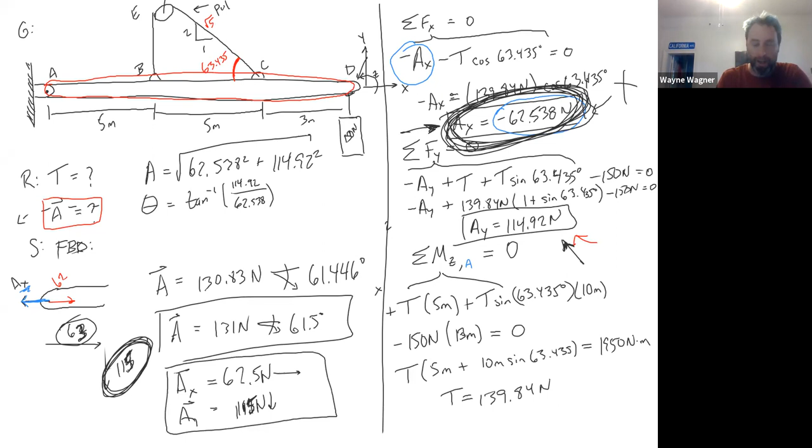So what most professors do, what I see from most of my students who have taken from other professors, so I'm assuming that's what most other professors do, is they'll have you do it like this. With AX and AY, just give an arrow. Because what they want to know is do you know what this negative number means? Not just can you do a bunch of algebra and come out with a negative number. It's like, can you make sense of it?

Okay. We're just about out of time, so I'm not going to be able to do my last problem. Just make a note here real quick. If there were an applied moment, like if somebody came up to this original thing and they said, you know what, right here, I'm going to apply a moment. Let's make it a negative moment. Like this, right? Let's not give it a letter. Let's give it a value. 100 newtons times meters. Let's suppose that was in the initial statement.

And the interesting thing about these applied moments is it doesn't matter where they're applied. All that matters in this case is it's in the Z direction. Meaning, if you take your pen and you just put it down at point C, sorry, I'm having trouble balancing it, so it's drawing everywhere. But if you put your pen down on C, you can see that this moment is going around that pen.

Anyway, the only way that would change this is that's a negative moment. And so in our moment equation, we would add another term of negative 100 newtons times meters. So it makes the algebra the tiniest bit, it's like one more term, but it doesn't make anything more difficult. I meant to work one of those today, but we ran out of time. I will work it next class, but I think next class is the test, right?

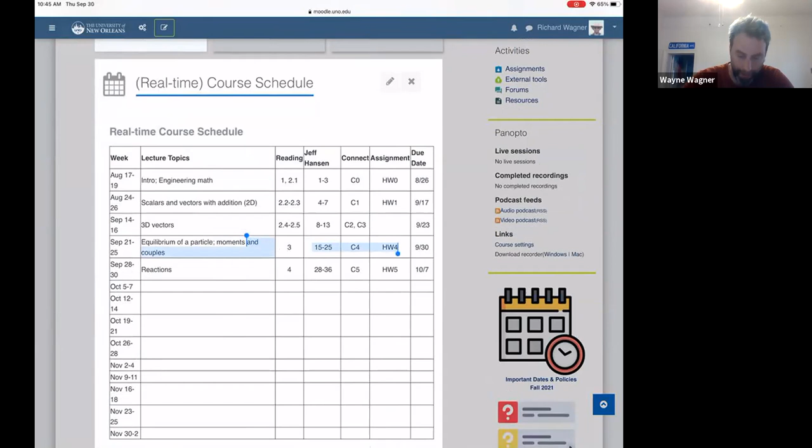Okay, so it's everything up to September 25th. Okay, thank you. Okay, so we could highlight that and we could say all of this. So it's homework up to C4 and homework 4. Which I guess I need to grade. I also need to grade homework 1. I got a lot of grading to do. So you'll get all that too. I'm really behind.

Any other questions? It doesn't reflect here, but you moved C4 back, right? You had said last class. Oh, I moved it back till Sunday, right? Correct. Yeah, so I'll clarify. So just homework 4 is due tonight. Yeah, I guess homework 4 is due tonight. Oh, wait, no, homework 4 is also due on Sunday. Sorry, homework 4 is also due on Sunday. Okay, that's great because I have a test today, so I'm trying to study for that.

Yeah. Like I say, I'm not trying to stress you guys out about the homework, but clearly a lot of you guys are stressed out about it. So please, let's focus on what you can learn from the homework and not about the grades for the homework. It's easy to say from my end. I can say, and I firmly believe this, that one of the reasons I was able to get a PhD, I think, is because I went up to the professor after class when I was working on my master's degree.

And I felt like there was an error in the key or whatever. And I was like, I think that this should be a negative sign. And I got like a 9 out of 10 or an 8 out of 10 on the homework. My grade was fine on the homework. And he looked at it and he was like, yeah, you're right. And then I could see this look of aggravation on his face. And I was like, look, I don't care about the point. I just wanted to know that I got it right.

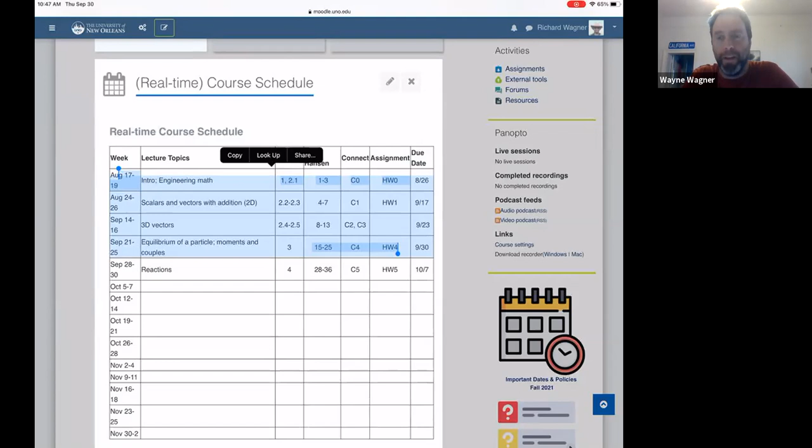He's like, okay. And I think that right there, I wasn't trying to kiss butt or anything, but in the long term, he ended up being my advisor for a PhD. And I think on some level that told him, oh, this guy is just trying to learn. I'm not saying the goal should be to impress me, but the goal should always be to try to learn. And that's actually why I really enjoyed y'all's questions today. You guys have asked really great questions. And thank you for that. Anything else?

Go ahead, Brandon. I interrupted you. Oh yeah, I retook all of your exams you posted on Moodle, and those were really helpful because you reuse the same 4 questions on your old exams, so I have a pretty good idea what might be on the exam now. Right. So I would expect a little bit of variety. I'll probably pop something in or pop something out, but it won't be different in scope or in kind of what we're aiming for. So,

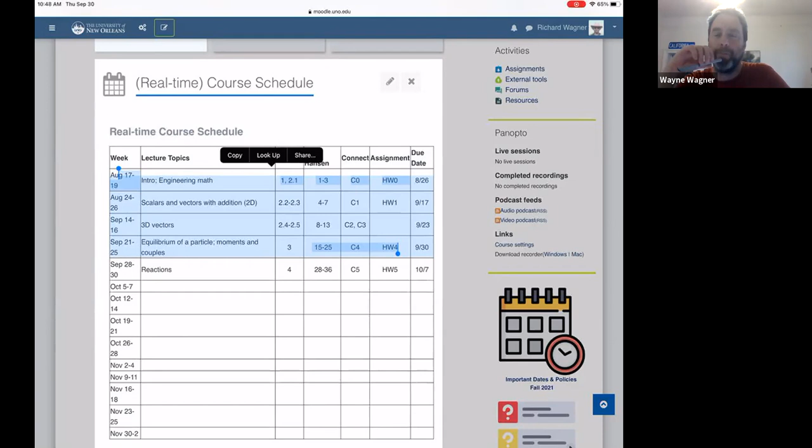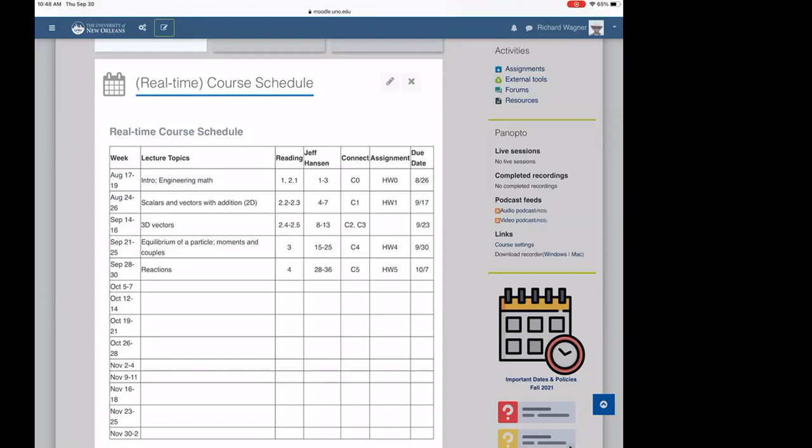Although I do think you are a bit tricky with your questions. There's some stuff that is unusual. I had to look at the answer key for a few of them because you can solve them halfway, but then you don't know what to do. But now I do. Okay. Well, I didn't mean to be tricky. I'd be interested if you would tell me what you thought was tricky, but not right now because we're in class and some people are trying to glean any last little bit of information before they go off to their next class. I know how it is. I remember.